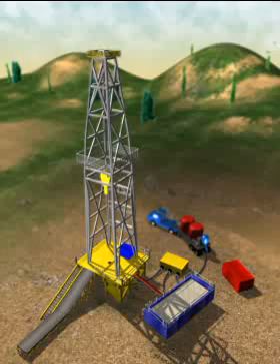There are many variations appropriate for a wide variety of applications. When a prospective target is identified, the operator will select a surface location from which the reservoir can be effectively drilled. The drilling rig and associated equipment will be moved in and rigged up.

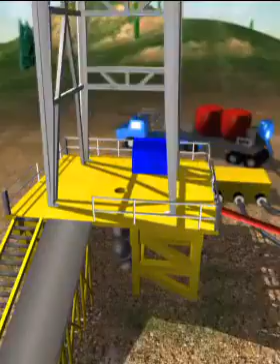First, the large diameter conductor pipe is driven into the ground, or alternately, open hole is drilled and the conductor casing is run and cemented conventionally. This pipe must be sized to accommodate all subsequent hole and casing sizes required to reach the target producing interval.

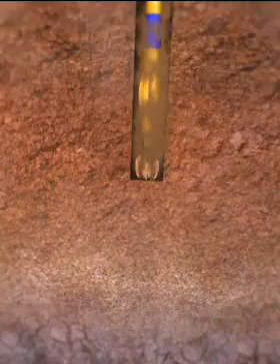The surface hole is drilled with a bit slightly smaller than the inside diameter of the conductor casing string. This hole is normally drilled to a point below the deepest known potable or drinking water layer. Mud is circulated to clean the drill cuttings from the well, and the bit is pulled out of the hole.

Surface casing is then run to cover the entire open hole and the previous conductor casing.

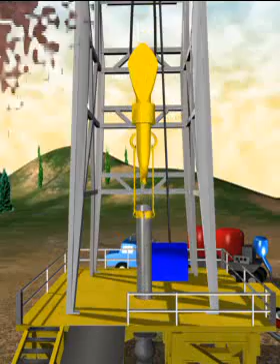When the surface casing has been landed in the wellhead at the surface, clean drilling mud is circulated to ensure that all the cuttings and excess mud cake have been removed from the open hole.

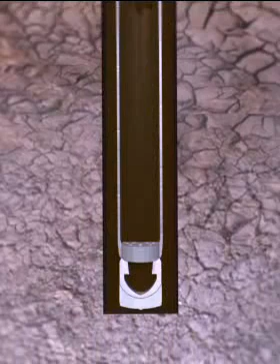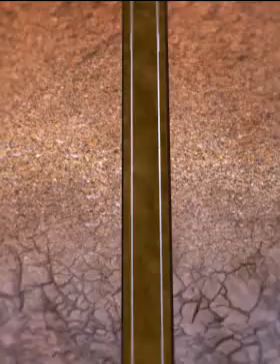When the mud returns are clean, cement is mixed and pumped down the inside of the casing, out the shoe at the bottom, and up the annulus, or the space between the outside of the casing and the open hole.

Special rubber plugs are used to separate the cement from the displacing fluid and to wipe the inside of the surface casing free of cement.

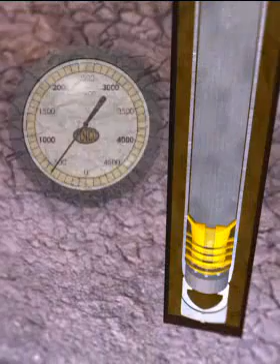The lead plug in front of the cement lands on a baffle plate near the shoe and ruptures to allow cement to be displaced into the annulus.

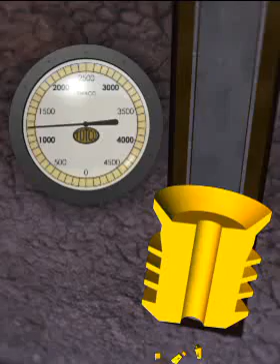The operator may choose to cement the entire surface casing to ground level or only a portion of it.

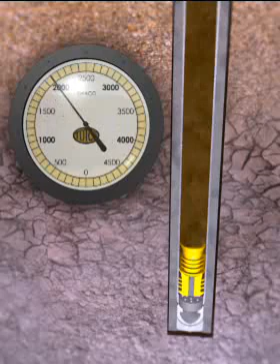When the second plug bumps at the end of cementing, a pressure increase will be seen and the pumps are shut down. Until the cement sets up, pressure must be held on the inside of the casing to prevent the heavier cement from U-tubing back inside.

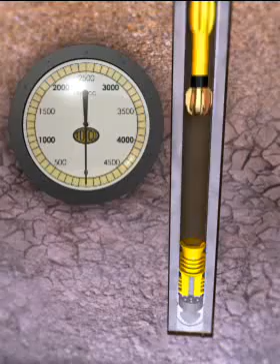Once the cement hardens, the next hole size can be drilled. After drilling out the shoe, the operator will perform required pressure testing to verify integrity of the cement job, as well as formation stability.

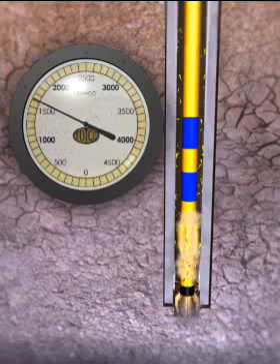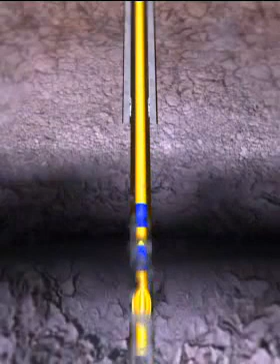The next interval of open hole is then drilled. If required, open hole logs may be obtained on wireline, followed by a cleanup trip to verify that the hole is in good condition to run casing.

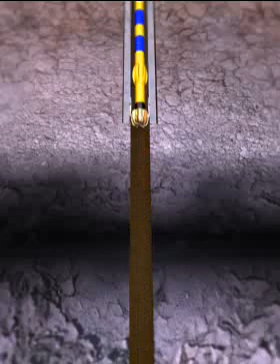Since the surface casing was run relatively deep, the operator has decided to install a production liner rather than running a casing string all the way from surface.

The liner assembly which is run is made up of liner casing and specialized equipment provided by an oilfield service company. Because it is critical that the components work in conjunction with one another, one manufacturer will normally provide all of the saleable and downhole rental equipment for a job.

The first section of liner to be run is referred to as the shoe track. The components are typically thread-locked together to ensure that they may be drilled out later without breaking connections and unscrewing from the liner.

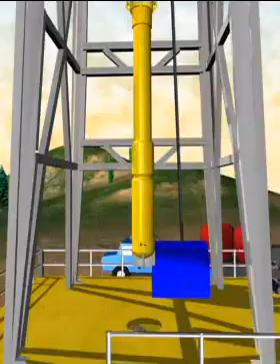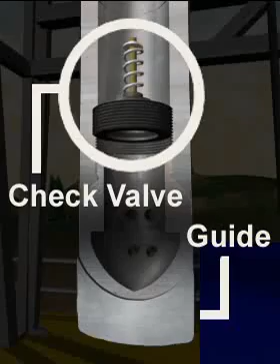The bottom of the liner is the float shoe, which performs two important functions. The shape of the shoe helps to guide the liner through the casing and open hole. Single or double check valves prevent backflow of fluids into the inside of the liner.

A ported baffle ensures that balls or plugs inside of the liner cannot foul the float valves.

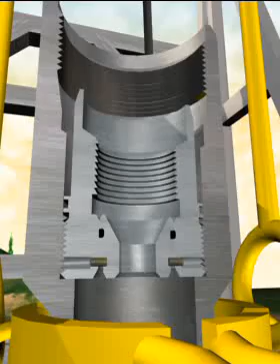The landing collar also performs two functions. First, a ball can be landed on the shearable seat to allow differential pressure to be applied to hydraulically actuated tools above. Increasing the pressure will shear out the seat and restores the circulation path.

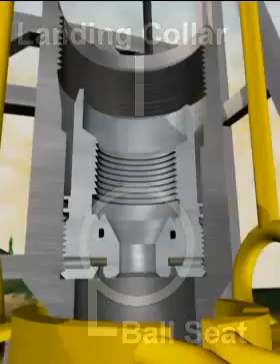Additionally, the collar ensures a specific stopping point for the liner wiper plug by providing a sealing and anchoring point when cementing is complete. All shoe track components are normally manufactured to allow sure and rapid drill out later.

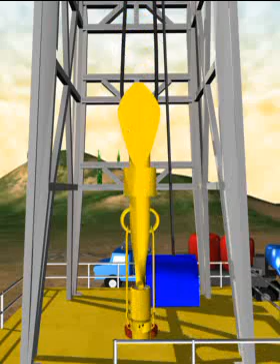As the shoe track is lowered into the well, the floats are checked to verify that mud is not backflowing inside. Additionally, the shoe track will be circulated through to verify that there are no obstructions.

The required joints of liner casing are made up above the shoe track. Normally, enough liner is run to completely cover the entire open hole plus 100 to 300 feet above the previous casing shoe. Since the float valves do not allow the inside of the liner to fill up as it is run, the liner should be filled from the surface to prevent the mud from collapsing the liner casing.

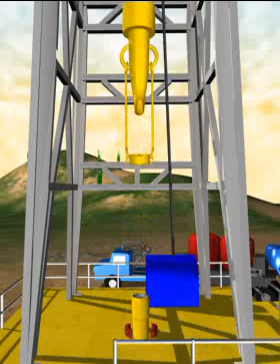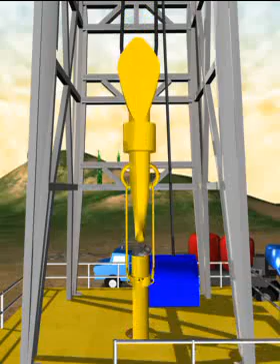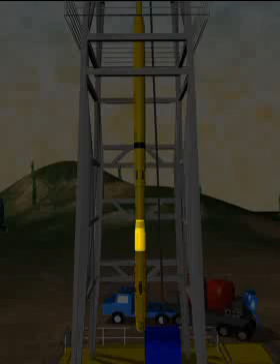When the required number of casing joints have been run, the liner hanger assembly is picked up. For this well, the assembly is comprised of the liner hanger, the drillable pack-off bushing, and the liner top packer. These are the components that will remain in the wellbore and are sold to the customer.

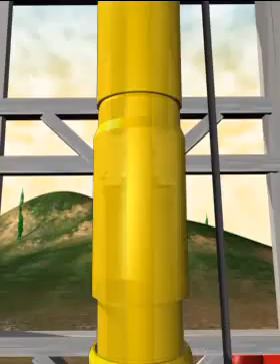Inside of the saleable tools, we also have our running tools, rented to the customer as a part of the liner installation service. The liner setting tool is used to connect the liner to the drill pipe. It carries the liner into the well and provides a reliable releasing mechanism when the drill pipe must be disconnected.

The slick stinger is a polished tube that seals inside of the drillable pack-off bushing to create a pressure seal at the liner top during the installation process.

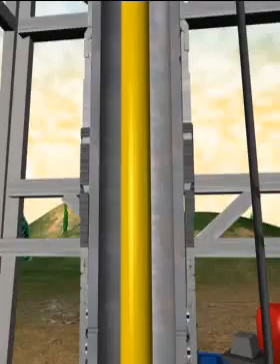The liner wiper plug is attached to the end of the running tool assembly or may be held in a special bushing in the liner casing below the hanger. The plug will be used to separate the cement from the mud later.

It is very important that the compatibility of the equipment is verified to be certain that the components work properly with each other and in the customer's well. This is checked initially in the shop when the equipment is loaded out, and then confirmed at the well site prior to running into the hole.

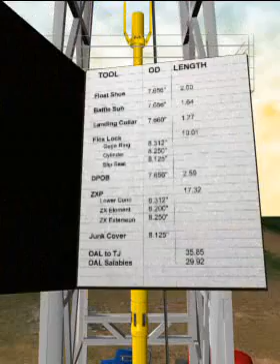Lengths, IDs, ODs, shear pressures, and other important details are recorded in the tool specialist's tally book as a final check. Information entered in the tally book becomes a permanent part of the well record.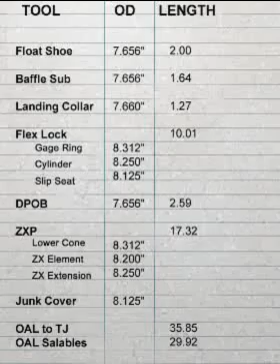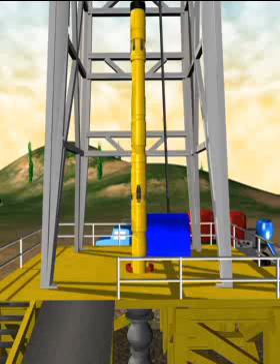The hanger assembly is made up to the liner and circulated through to ensure that there are no obstructions. At this time, the rig crew will rig down the casing handling equipment to run the liner into the well on drill pipe.

With the liner full of mud, pick up and slack off weights are recorded. The weight of the liner should be close to the calculated weight with the proper buoyancy factor applied.

The liner will be run into the hole until the liner shoe reaches the previous casing shoe. Again, we verify that we can circulate and we record the pump pressure. This will ensure that the drill pipe, liner, and annulus are filled with clean mud and hydrostatically balanced.

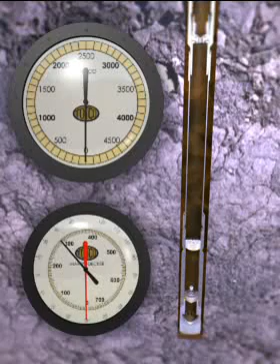The liner is picked up off bottom, and the well bore is circulated clean to remove any cuttings from the annulus.

At the surface, special equipment has been rigged up on top of the drill pipe, which will be used to perform important operations during the cement job.

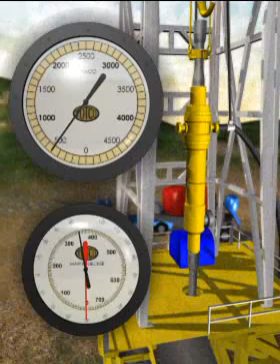Because the hydraulic set liner hanger requires differential pressure to activate, we will drop a ball from surface to pressure up against.

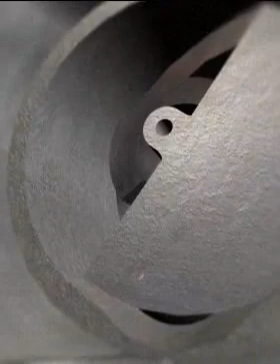When the external handle is unlocked and rotated, the positive ball dropping sub will expel a setting ball into the ID of the drill pipe. The setting ball will be allowed to fall, or may be pumped until it lands on the seat in the landing collar.

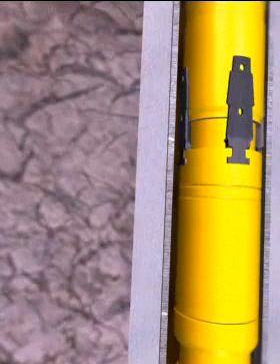As pressure is applied at the surface, the hydraulic cylinder of the hanger shears and strokes the slips upward until they contact the casing wall.

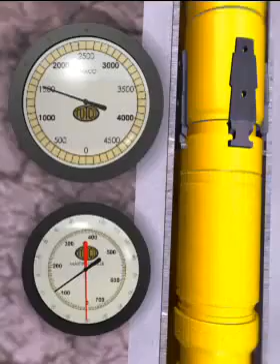As the weight of the liner is slacked off, the hanger slips transfer the loads to the previous casing string. The liner is now hung with the shoe several feet off bottom. The liner casing is in tension.

To regain circulation, the setting ball is blown out by increasing surface pressure to shear the pins in the seat. Circulation is re-established, and the well is circulated until smooth and steady pump pressure is observed.

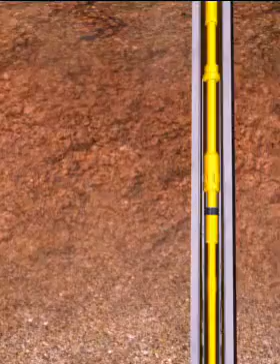With the liner hung, we are ready to release the drill pipe from the liner. The releasing operation will depend upon the type of setting tool used.

The C2 liner setting tool releases by simply rotating the drill pipe to the right about 10 turns. Right-hand rotation disengages the float nut from a special carry-in thread profile in the body of the liner top packer.

The drill pipe will now be picked up to verify that the setting tool is released. We expect to only see the weight of the drill pipe on the weight indicator, since the liner is now being supported by the liner hanger. We only pick up a couple of feet, as we do not want to activate our packer setting device yet.

Once we have confirmed that the setting tool is released, we slack off and circulate to verify our pack-off integrity. We must slack off enough to overcome upward piston forces on the bottom of the pack-off.

We are now ready to perform the cement job. The cementing company rigs up specialized blending equipment and pressure tests their pumps and surface lines. Once the cement is mixed and the properties are tested, it is pumped down the drill pipe

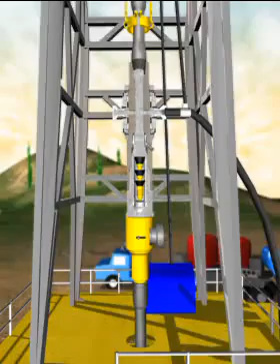and into the liner. At the surface, the cement is pumped through a cementing line into the TD swivel port. The cement flows around the pump-down plug, which is resting on a flapper inside of a sliding tube.

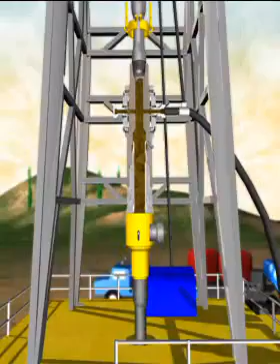When the required volume of cement has been pumped, the plug lock is turned, the tube drops, and the pump-down plug is forced out of the TD plug dropping head. The flag sub provides visual confirmation that the plug has been pumped down the drill pipe.

The pump-down plug follows the cement down hole, wiping the drill pipe and separating the cement from the displacing fluid. As the pump-down plug nears the calculated displacement to the liner wiper plug, the pumping rate is reduced.

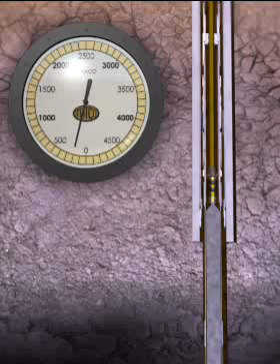A pressure increase may be seen when the pump-down plug latches into the liner wiper plug, and the plugs will shear off of the running tool assembly. Displacement continues as cement is pumped out the liner shoe and up the annulus.

As the plugs near the landing collar, the pump rate will be slowed again, and the bump will be observed by the increase in pressure.

When we are comfortable that the plugs are holding tightly, the pressure is bled off, and we check to see that there is no backflow through the float valves as the heavier cement tries to U-tube back inside the liner.

Now that our cement is in place, we are ready to set the liner top packer. To do this, we will pick up the drill pipe, expose the spring-loaded dogs in the packer setting dog sub,

and apply set-down weight of the drill pipe. When sufficient weight has been applied to shear the setting pins in the packer,

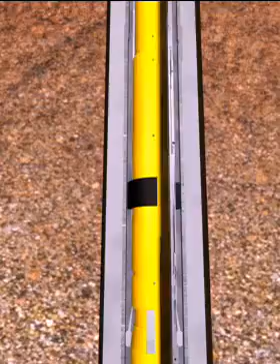compression will energize the seal element and engage the hold-down slips into the casing wall. The packer is now set and will provide an effective annular seal between our liner and the previous casing string.

Before pulling the drill pipe and setting tools out of the hole, it is recommended that excess cement should be circulated out from the annulus above the liner top packer.

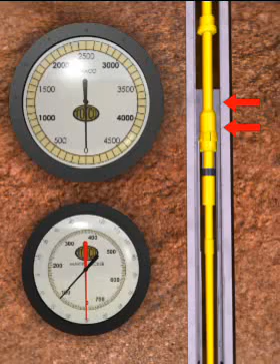First, the drill pipe is raised to remove the slick stinger from the drillable pack-off bushing. A light pressure test may be performed to verify that the liner top packer is sealing if desired.

Since the pack-off is not sealing, circulation at the liner top will remove excess cement from the drill pipe annulus above the packer.

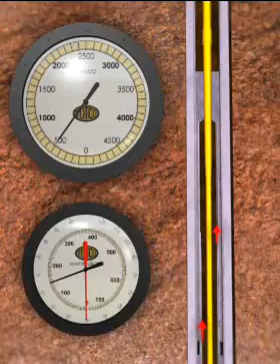When the returns from the annulus are clean, circulation is stopped, and the running string is pulled from the hole.

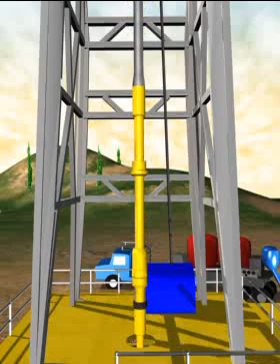At surface, the setting tools are cleaned and their condition is checked before preparing them for return shipment to the district.

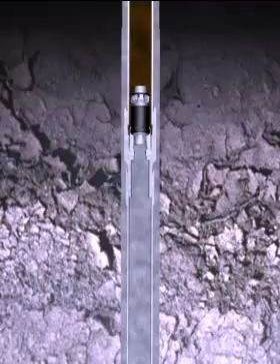The customer's well now has a newly cemented liner in place, hung off from the previous casing string and with an effective annular seal. It will be ready for production or drilling ahead after the cement sets up.

This completes the demonstration of installing and running a liner system.